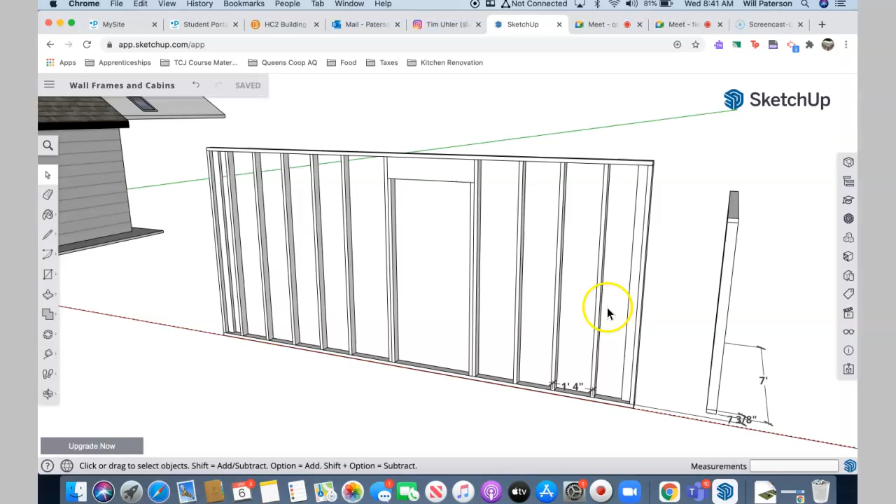Okay, so here's where we're at. So yesterday, what I did is I made this very attractive, particularly the colors, model of mine, which is the Centurion Palace of Solitude, and right next to my other creation. Remember this little guy? There it is, the Cubby triplets. Okay, I'm putting them all together. So that's what I did. That's what I did yesterday.

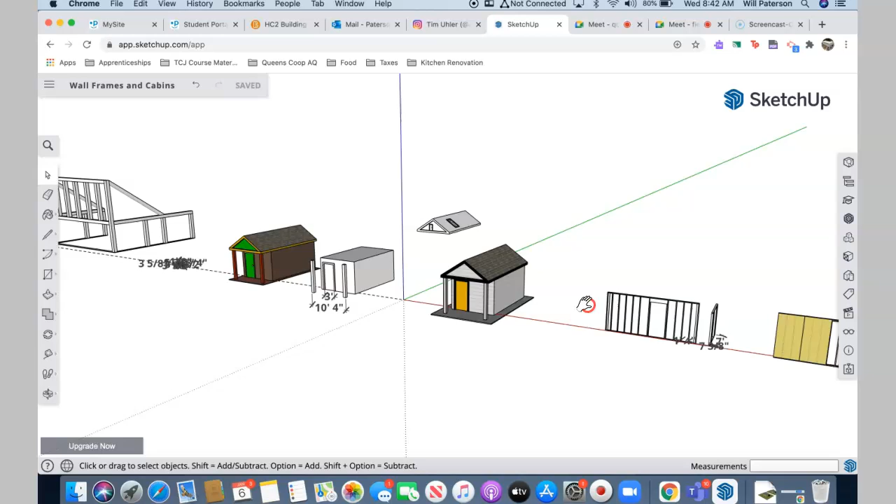And then the trick now is to get from that, which is the concept sketch. Okay, and here's the same thing, by the way. I just happened to redraw it. That's the same thing. Colors are a little bit nicer here. So to get from here over to here, which is where you're actually framing the thing. So in order to get from A to B, in order to get from the concept sketch to the frame model, you need to understand exactly how to draw just a regular wall. Okay, just a regular wall.

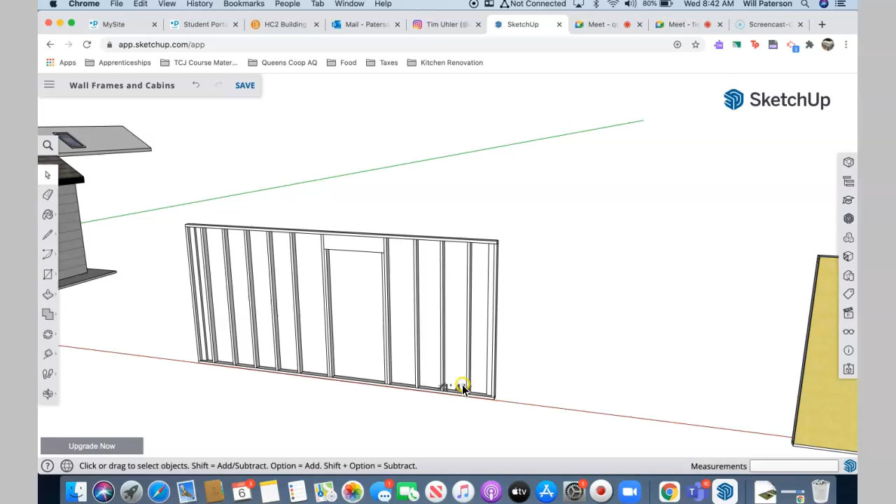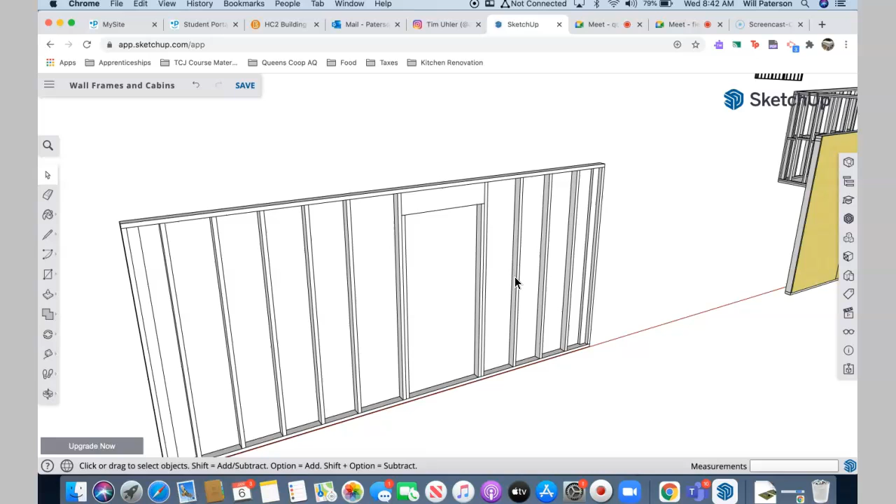So I'm going to get rid of a couple things here, and there we go. So this is just a regular wall. Now, Mr. Figuera, he kind of went through before Christmas and looked at a little bit of the anatomy of a wall, looked at a little bit about the spacing and that kind of thing, and so this will serve as a bit of a refresher, but then also to jump ahead and understand exactly how to build it. So I want you to understand a couple of things here before I start drawing.

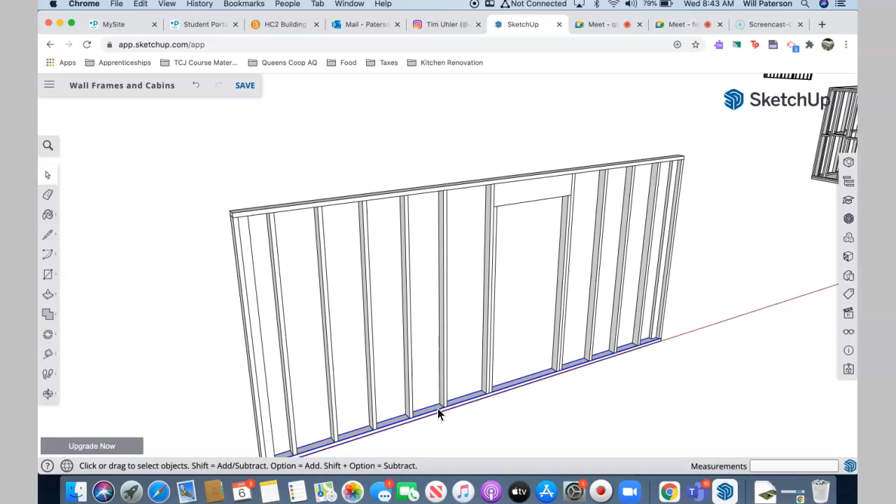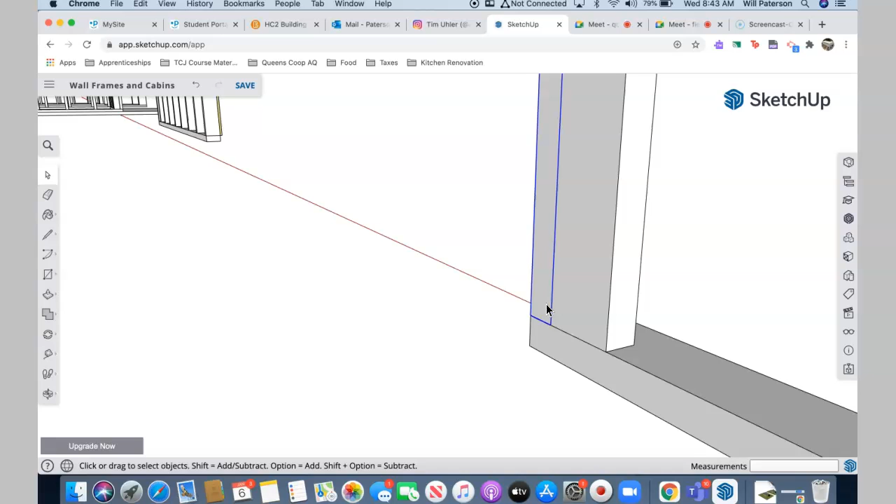The first is just some of the names here. So the pieces, the regular pieces here, these are called wall studs. Okay, wall studs, and bottom plate down there, top plate up here. Okay, bottom plate, top plate, and then down at the ends here. I'm just going to jump inside. There we go. Okay, down at the ends here, you see how this looks kind of interesting. You've got that piece in the end. You've got the end stud there, so the stud on the end. Then you got this other piece here that's spun 90 degrees.

So that is called an inside corner. Okay, just remember that it beefs up the corner. It allows you to nail or screw the drywall on that wall when there's another wall that comes in. This is called an inside corner. You will understand more about it when time comes and when we start putting the walls together.

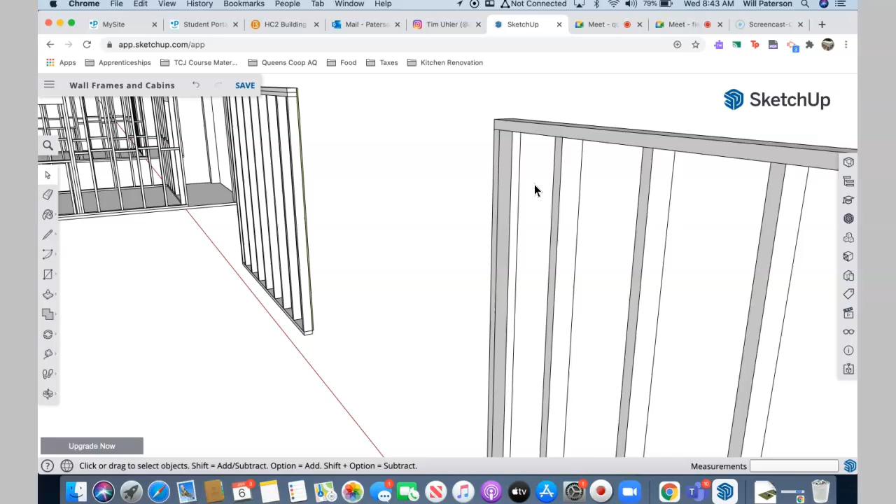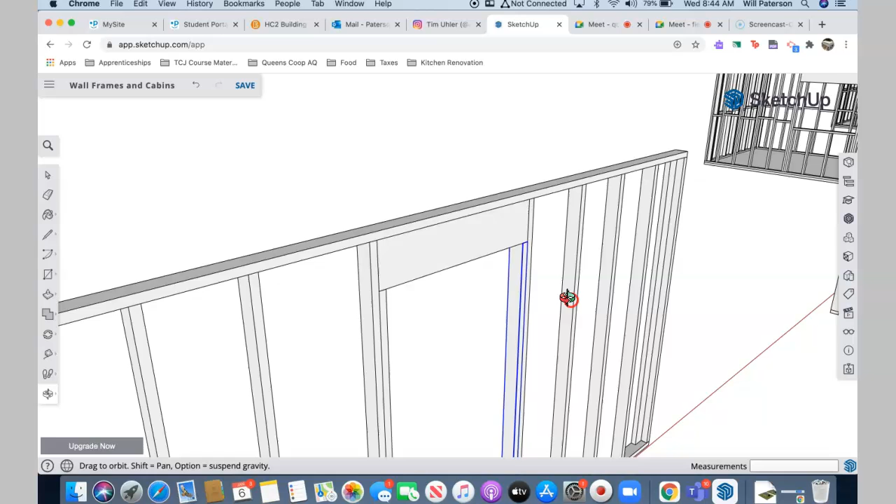Okay, and then for the openings, so for window and door openings, let me back out here. For window and door openings, you've got the piece across the top, which is called a header. Okay, that's a header, and then you've got this piece here that holds up the header, and that's called a trimmer. There we go. So that's called a trimmer. It holds up the header, and then you've got the king stud beside it. So that piece that goes all the way up is called a king stud. That's a trimmer. That's a header.

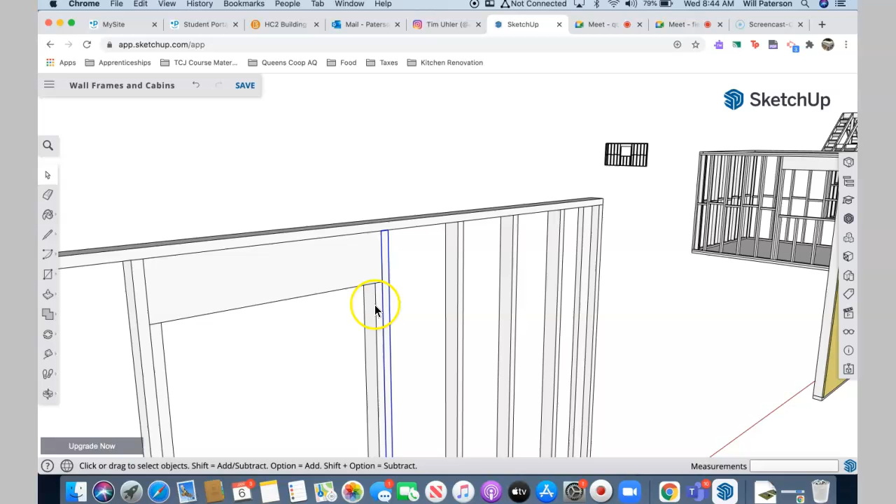Okay, and so now what I'm going to do is I'm going to start drawing a wall. I don't know if you notice this in SketchUp. It's a little bit wonky the further you get from that center point there. Where the blue line, the green line, and the red line intersect, the further you get away from that, then it's a little bit more difficult to navigate. So I'm gonna move things around so I can draw close to there.

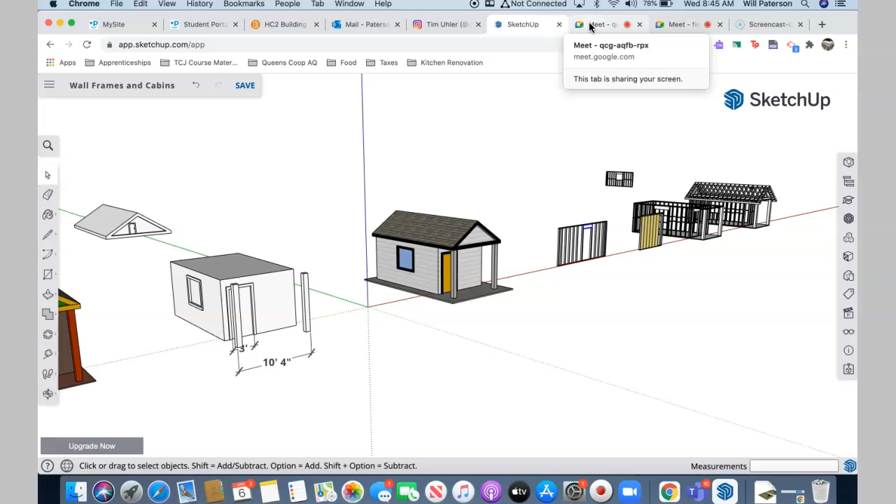Okay, did I hear something come through in the chat here? Oh, hi. Yeah, so Malcolm, just hang tight. Have a look at what we're doing because you're going to be doing some of the SketchUp stuff too. Okay, and I am presenting.

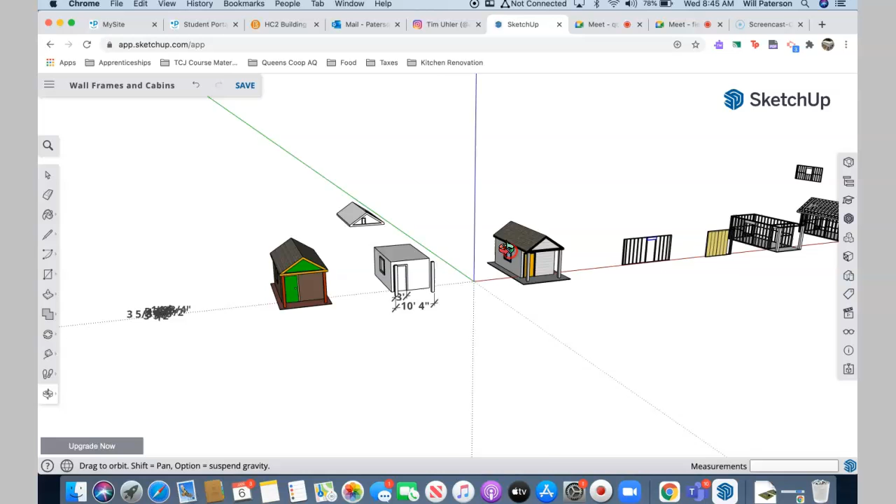All right, so I'm just going to shuffle things around here so that I can do some drawing closer to the intersection of the axes. Okay, so I'm going to take this and I'll move it.

I'm going to move it over here. Notice whenever I move things, I always stay true to the axis. So I make sure that it's a green line. That way it stays on the axes.

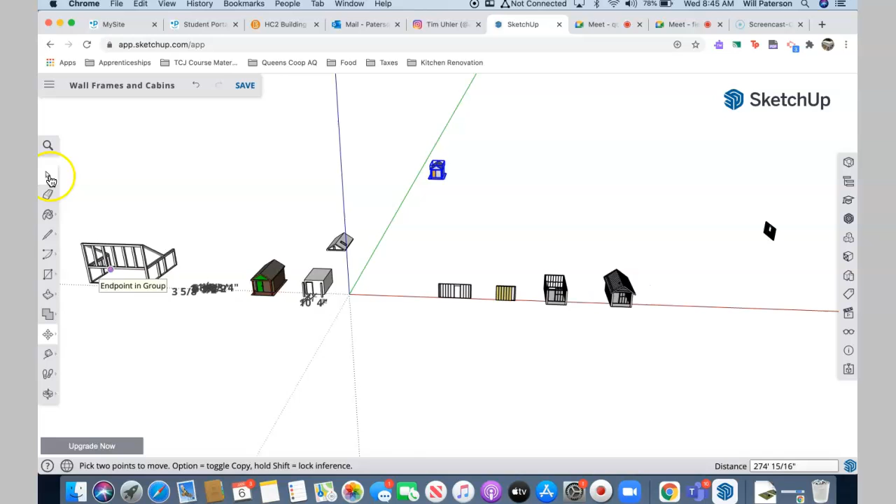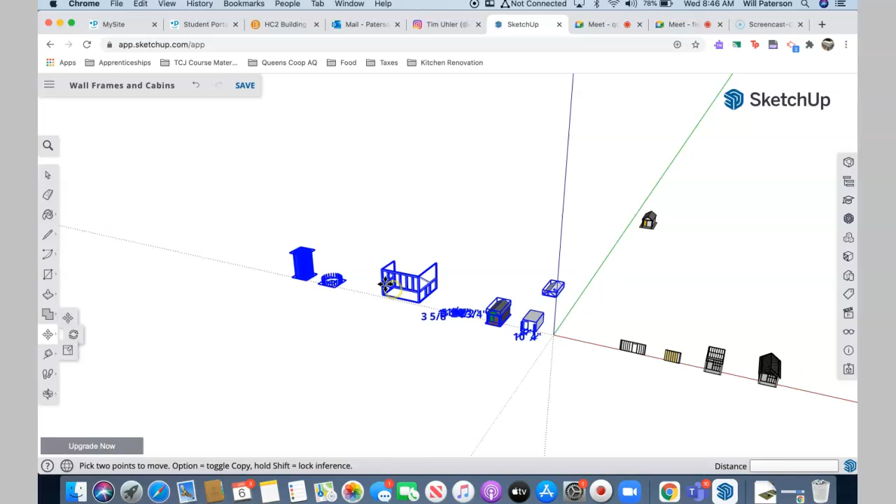Okay, these things over here. Look at that. This is from a person who wanted to do radiused walls. She wanted to do a turret. A turret is like those old castles that have the round walls and sort of the conical roof. That's called a turret. So she wanted to incorporate that kind of thing. See how I moved all these things all at the same time.

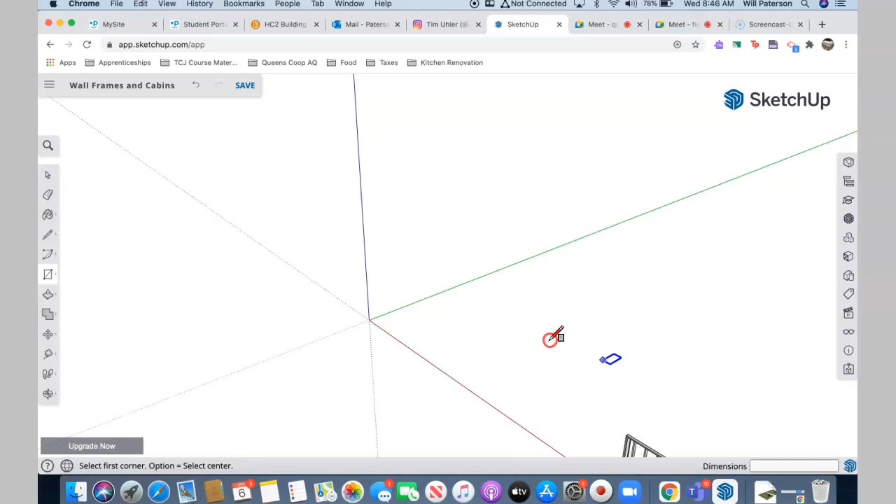Okay, and now what I'll do is I'll come in here and I'm going to draw. So whatever I do here, this is what I want you doing, just to practice getting the hang of building a wall. So I'm going to start to draw a rectangle. I'm going to draw the bottom plate of my wall, and let's make it 101 inches, just for argument's sake.

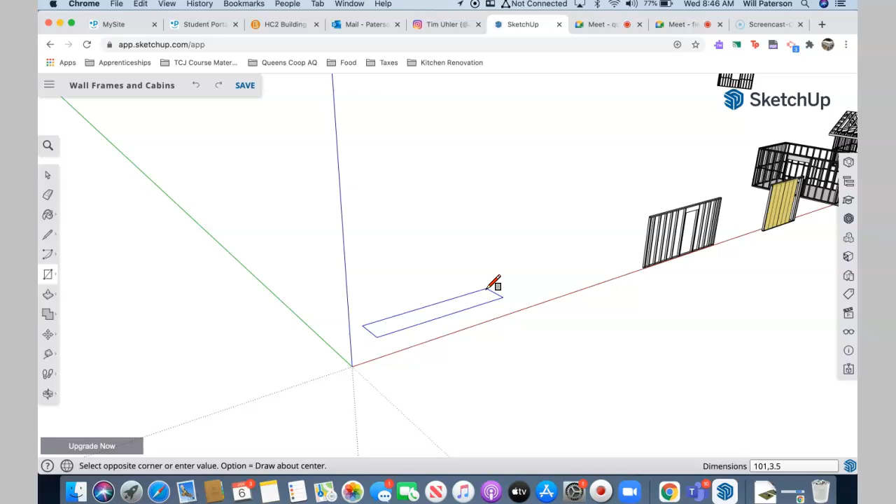So I'm going to type 101, comma, 3.5, okay? 101 and 3.5. Now, why 3.5? The reason is because what we're drawing here is a 2x4. A 2x4 is 3.5 inches wide, and it's 1.5 in thickness. So that's what I just drew.

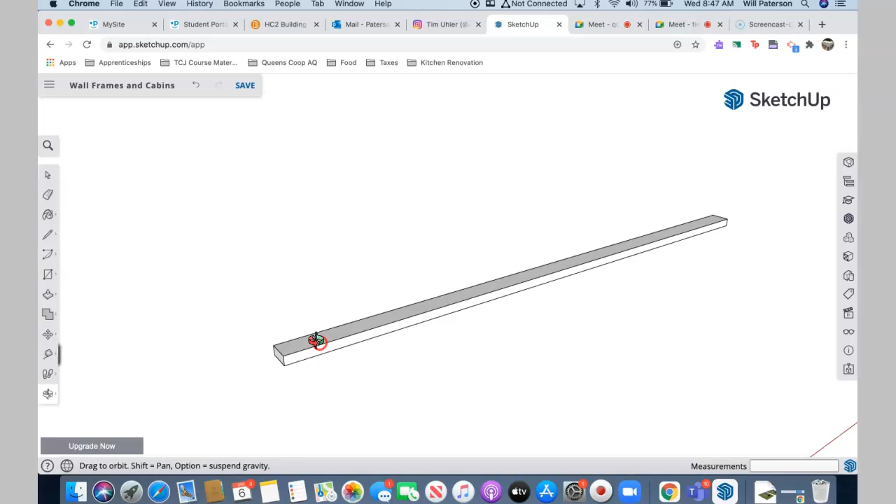If I took my tape measure here and look at the end, this is a 2x4. This is 3.5 inches wide. It is 1.5 inches high. And then the length is whatever it is. Now there's nothing that has to happen to this 2x4. This is the bottom plate of the wall, so it's basically done. I'm not gonna cut a curve in it or drill holes or anything.

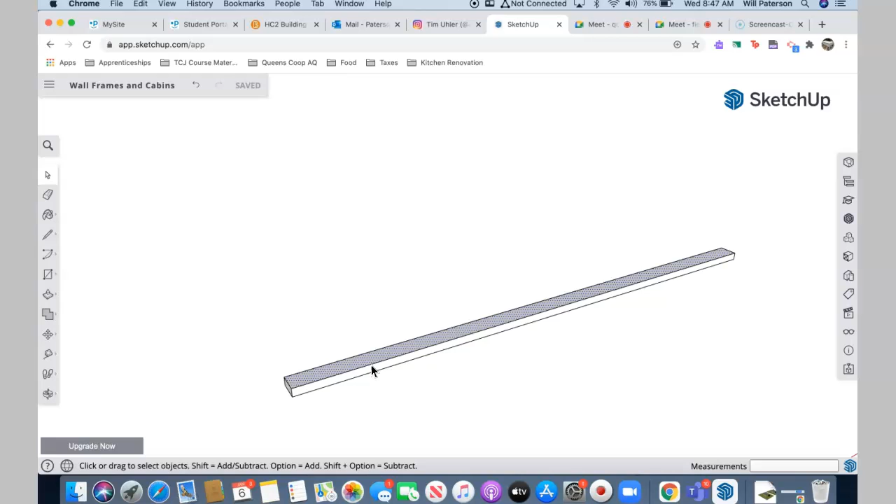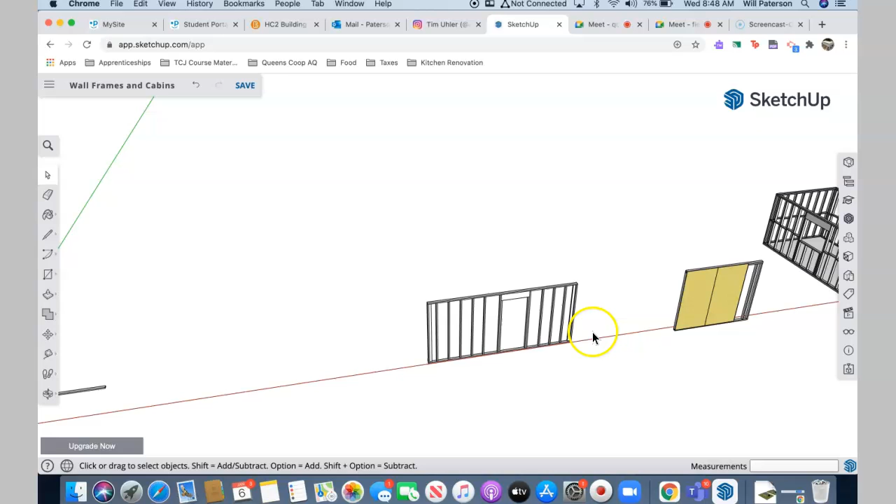So I'm gonna triple click, 1, 2, 3, make it a group, and then the next thing I'm going to do is start laying out the wall. Now, I mentioned this yesterday, and we've talked about this before. Mr. Figuera talked a little bit about it as well. We talked about 16-inch centers, the spacing between the studs.

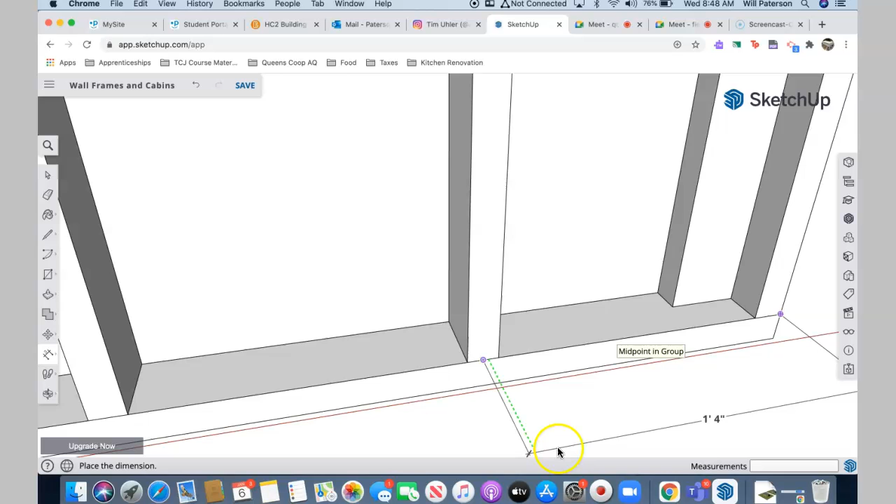So I'm going to take my dimension tool here and start measuring. From the end of the wall to the center of the first stud is 1'4". You see that? And from the center of that stud to the center of this stud is also, let me just see if I can move that, there we go, 1'4".

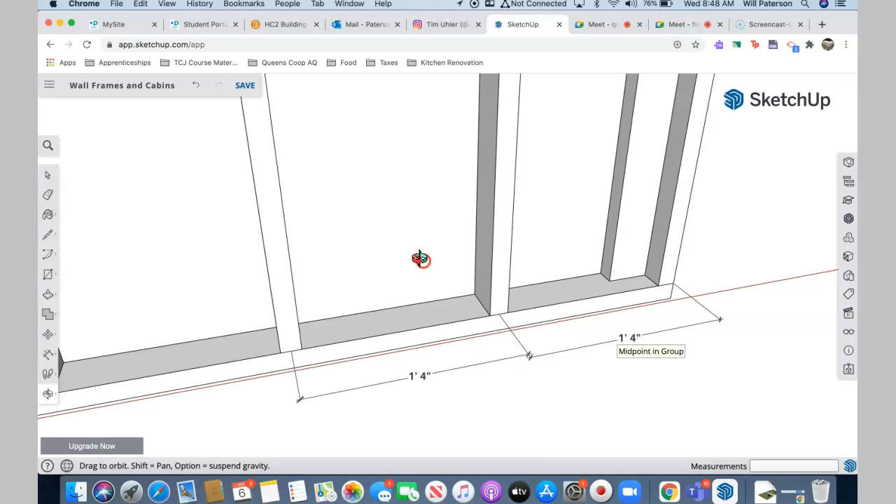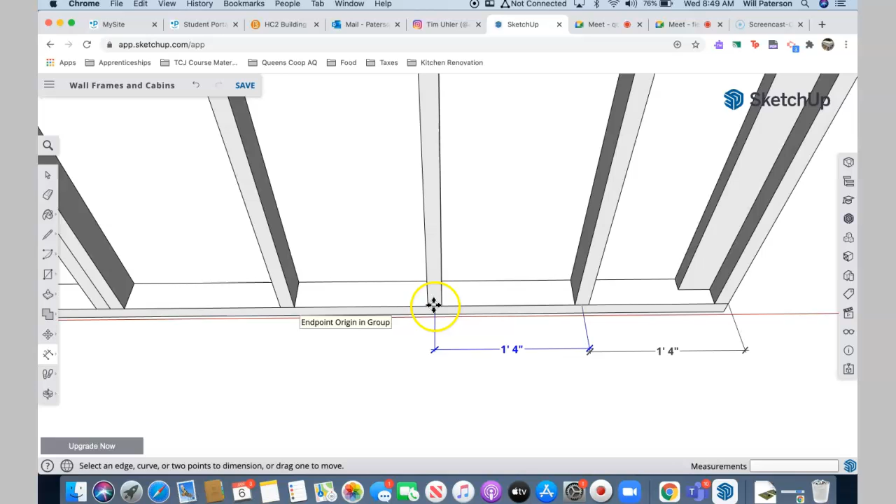And this is really, really important to know, because this will mean that your plywood and drywall and insulation will all fit. So from the end of the wall to the center of the first is 1'4", and then center to center of each one after that is similarly 1'4". I'll do one more here. From here to the center of this one is also 1'4".

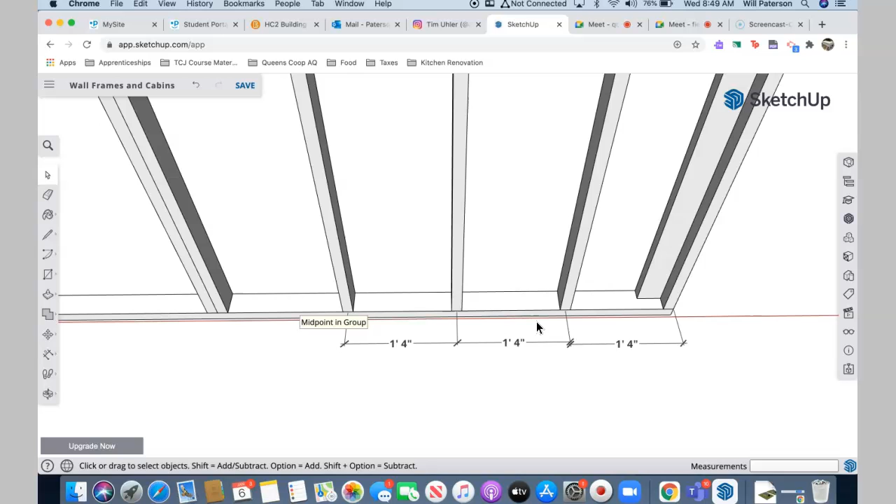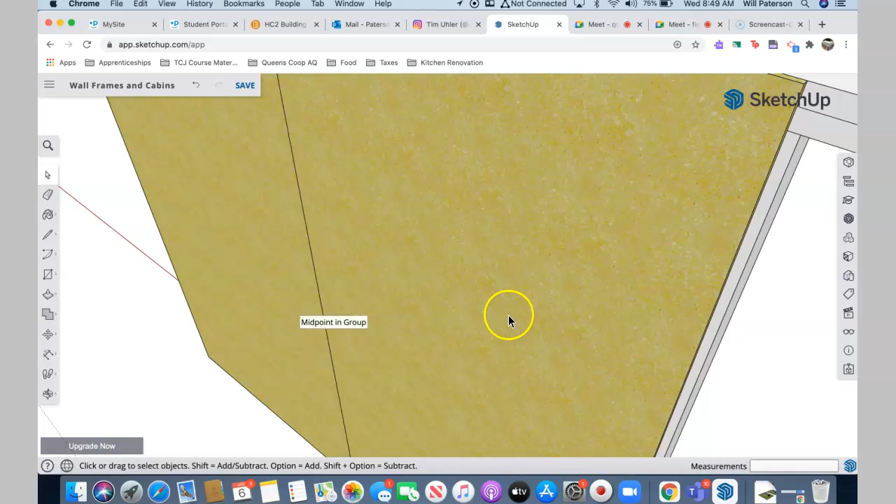Now, I am measuring to the centers, not the edges, just to make you understand that when the material goes on, like this plywood here, it ends up being in the center of a stud. See that? The plywood or the drywall ends up in the center of the stud. That's why we call this on-center spacing, or 16 inches on-center.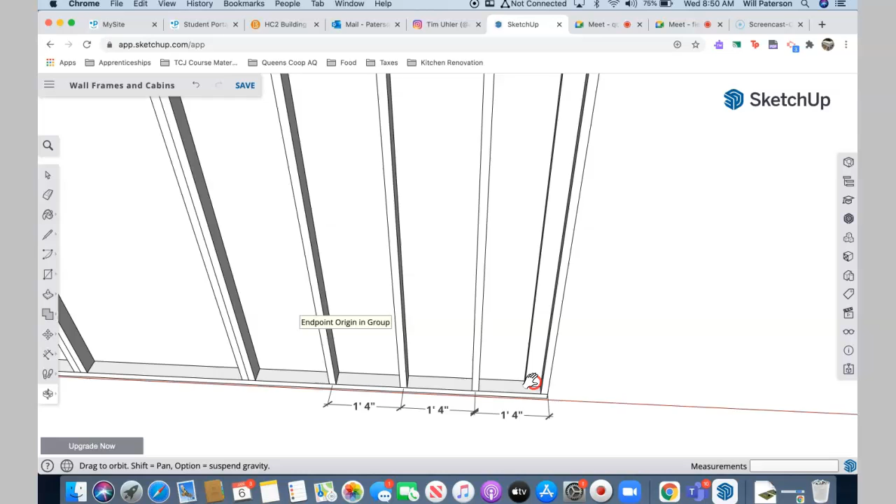But for actually building this, when you're laying it out with a pencil and a square and drawing lines on the wood, instead of marking the center, you mark the edges. To mark the edges, I'm just going to get rid of this inside corner so it doesn't confuse you, okay?

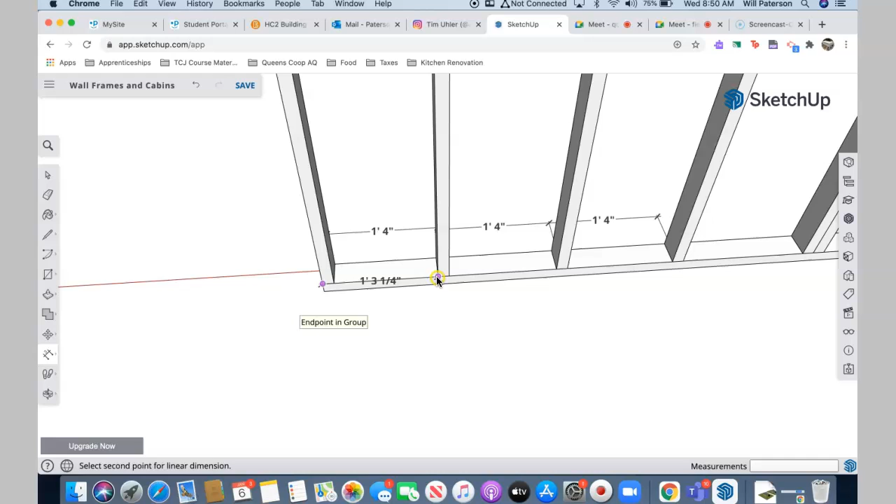So to mark the edges, I'm going to take the same dimension tool, and I'm going to go from here to this edge here, okay? And that's 1'3¼", and then from that point on, it's 1'4" edge to edge, 1'4" edge to edge, and so on. Okay, so you see that? So for laying this out, that 1'3¼" is 15¼ inches. That's from the end of the wall to the edge of the first stud.

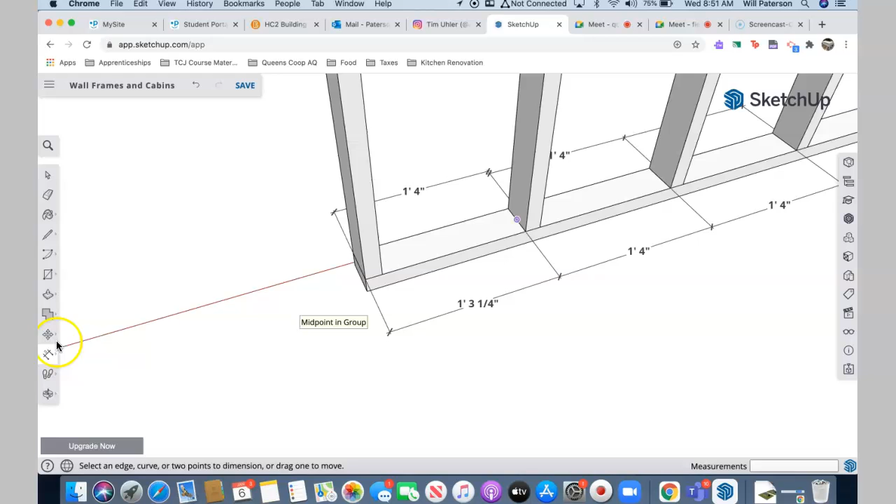And then from the edge of that one to the edge of that one is 16, which is the exact same thing as if I measured from the center to the center. It's the same dimension from the center of that one to the center of that one. 16 inches from center to center, or 16 inches from edge to edge.

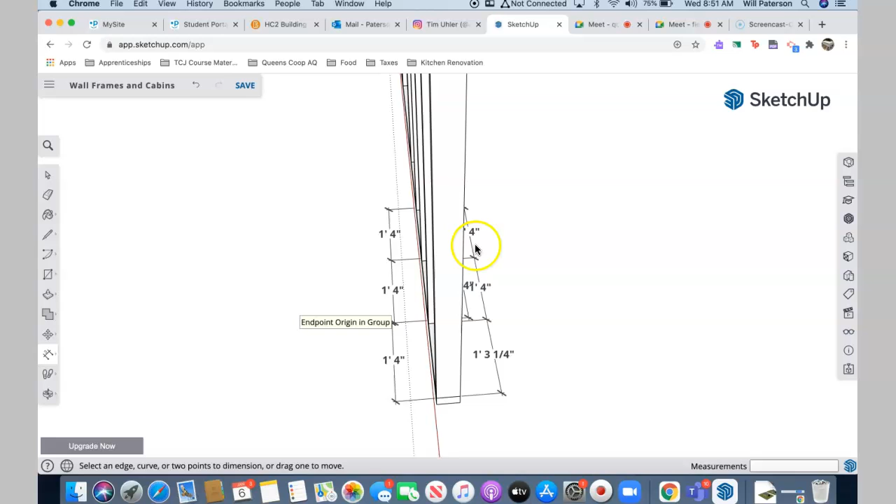Okay, so let's use that information, and we're going to go over to the wall that I'm building over here. And here's my bottom plate. And so now I'm going to take my tape measure tool, and I'm going to come down here and start laying out this plate. So from the end here, remember what I said, we're going to go to the edge. We're not going to go to the center. We're going to go to the edge, because that's how you build stuff. You line it up with the edge. You make a pencil mark that represents the edge of a piece of material.

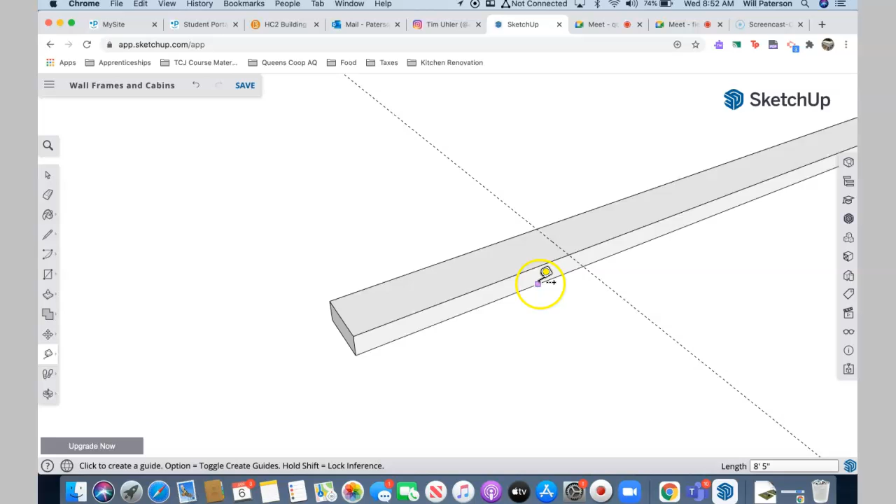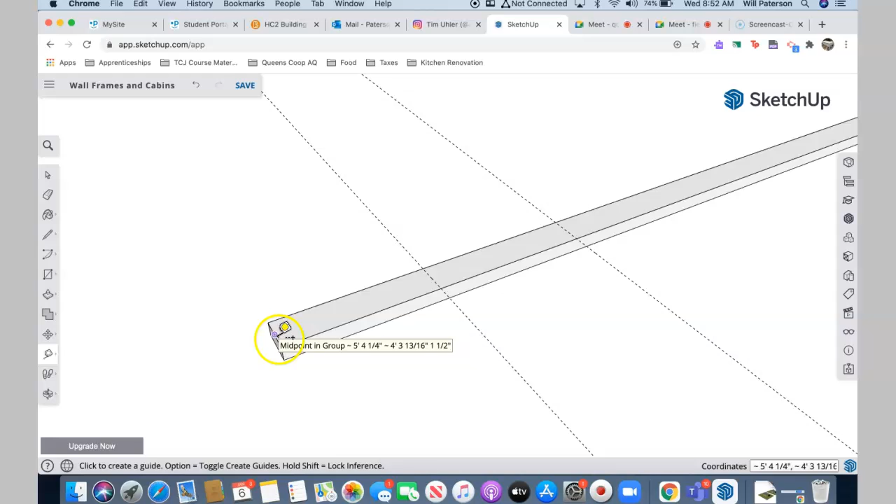Okay, so it was 1'3¼", which is 15¼, which is 15.25, and I hit enter. And so that gives me my starting point. And then after that, it was 1'4" or 16 inches from this line on. So I'm going to go 16 inches and enter like that. And so I'm going to place a stud on the right side of those lines. Now, how thick is a stud? Well, it's the same as the bottom plate. It is 1.5 inches.

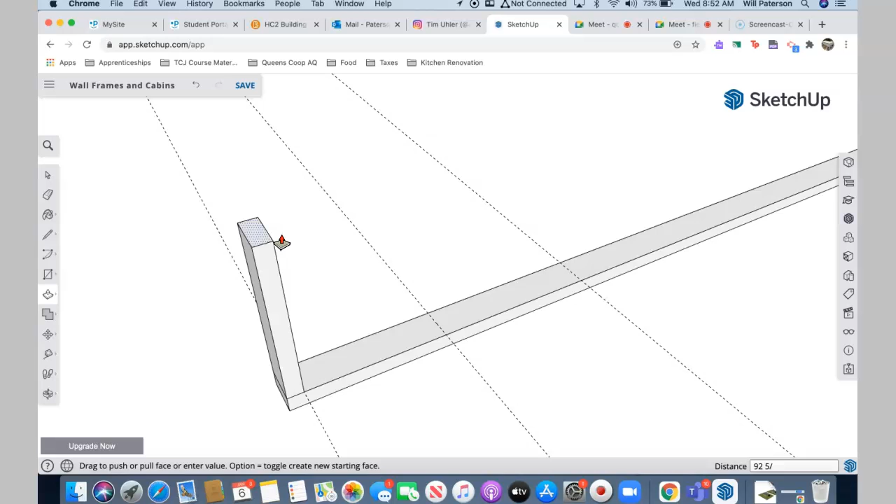And I'm going to take this rectangle tool here, and I'm going to draw a rectangle there. Now, I'm going to lift it up. Just bear with me here, this sounds strange, but watch this. And I think Mr. Figueroa might have touched on this. The height of this stud, I'm going to make it 92 5/8. Now, why am I choosing that weird number, 92 5/8 of an inch?

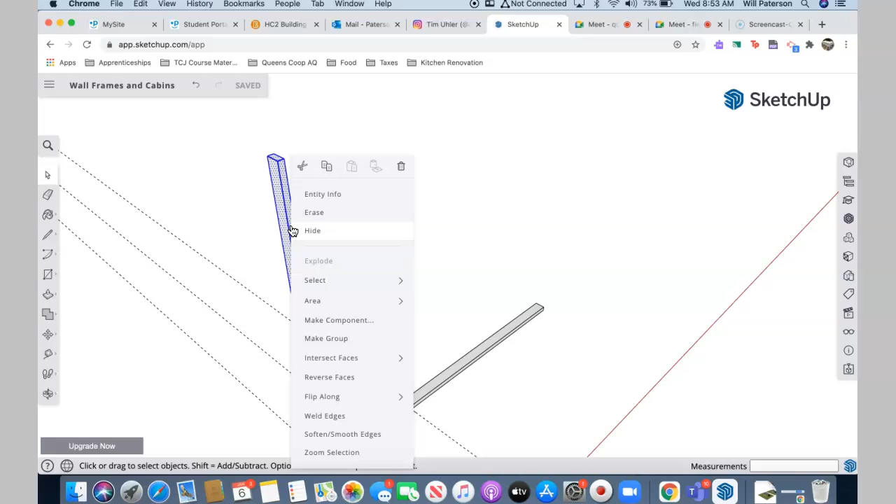The reason is because that is called a pre-cut stud. You can walk into Home Depot and buy that, and it's a little bit cheaper than a 96-inch stud, which is 8 feet. And the thing about these is they're already cut so that if you just nail a wall together, you will end up with an 8-foot wall in a house. So these are called pre-cuts, and that's what I'm going to use for mine. So I'm going to make this a group, because that's all done.

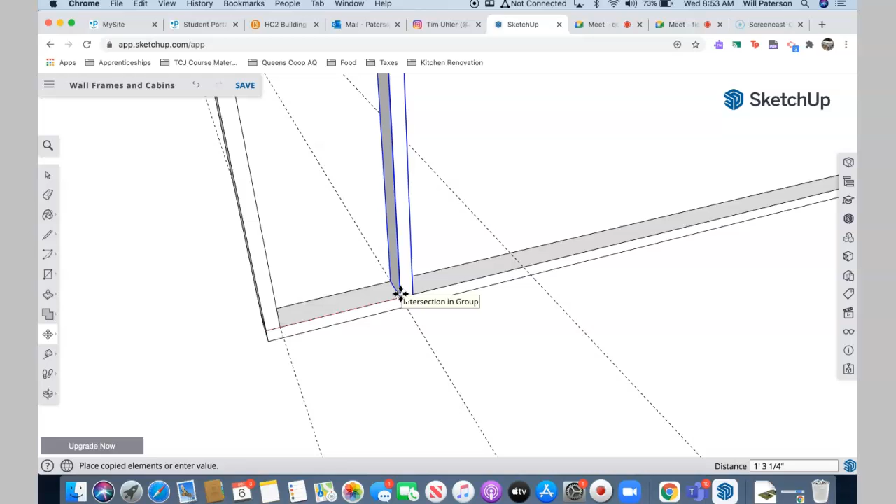And now, watch this. A little bit of magic here. What I'm going to do is take this and move and copy it. So I'm going to grab it here, move it, copy it, and place it just to the right of that line, just like that. And next I'm going to move and copy the next one. Now, this is where the magic happens. Just pay attention to this. So this is the third stud along. I'm going to place it by clicking, and then don't do anything else.

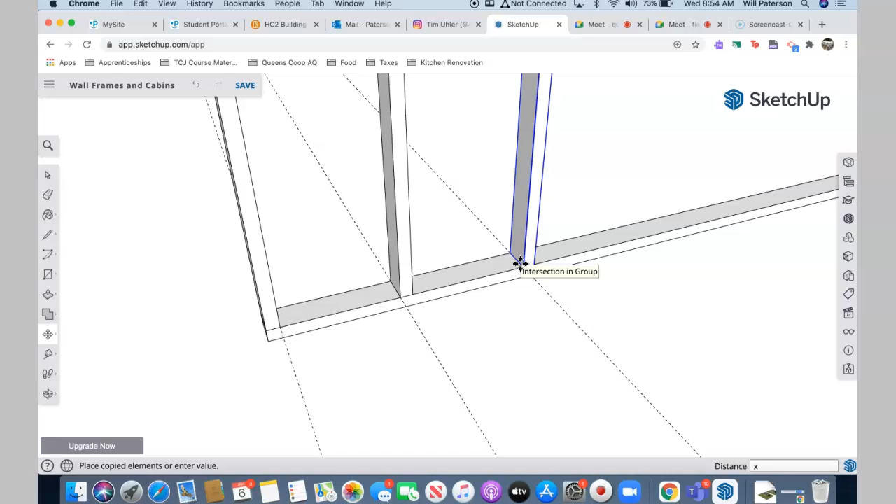On your keyboard, hit multiply. Look in the bottom corner. See the X? I just made an X. Multiply by however many studs you want. I'm not sure how many I want, so I'm going to put 8. It's probably more than enough, but I can delete it. So see that times 8? I'm going to hit times 8 and press the return key, which is the enter key. And look what happens. It gives me a ton of studs.

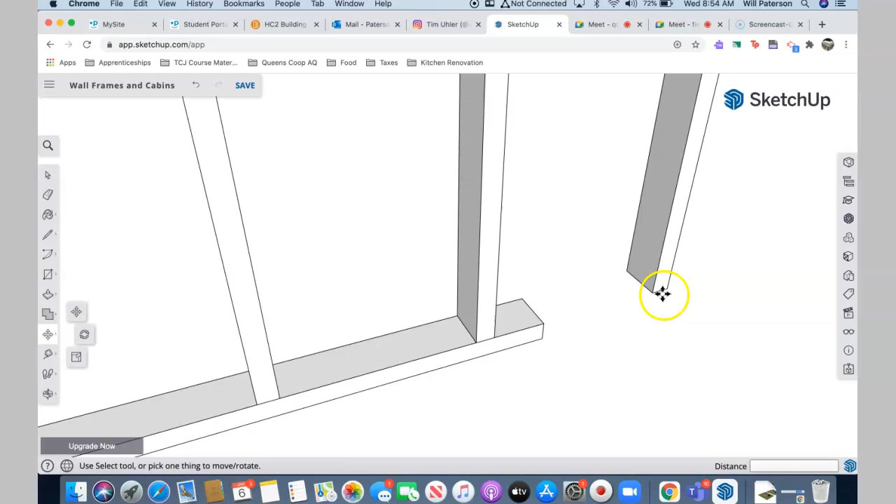And now I don't need all those studs. I'm going to keep one of them there. So I'm going to take that one that I kept, and I'm going to move it like this, right onto the end of the wall, like that. Okay, and that's almost done. So now I'm going to put a top plate on it.

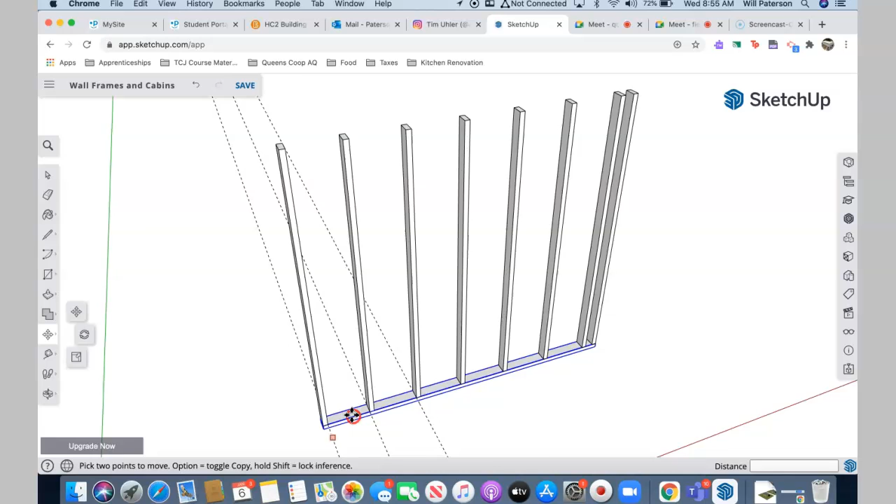So I can take this bottom plate and move it up with the move tool. I'm going to grab it here, start lifting it, hit the Option key on a Mac or Control key on a PC, and place a copy of that bottom plate at the top. Okay, let me get rid of my guidelines.

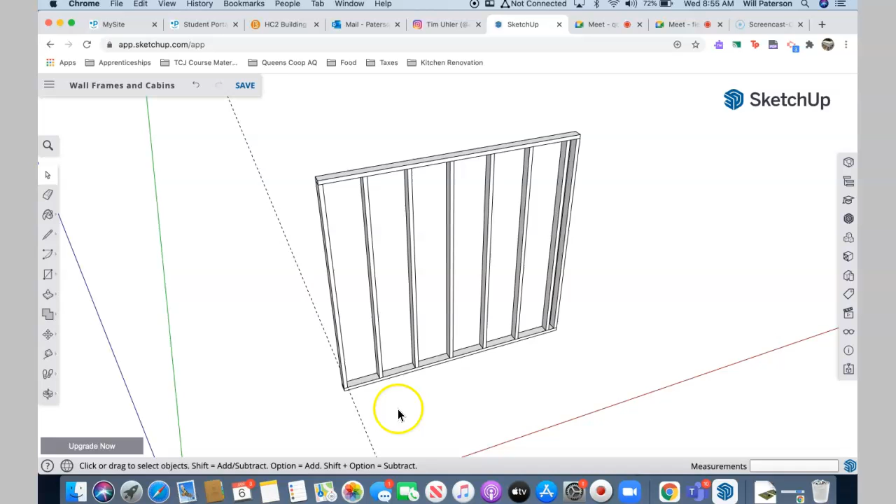Okay, that is a basic wall. There are a few more things we'll add, but basically here's what I want you to do, and here's what you're going to show me, or at least hand in.

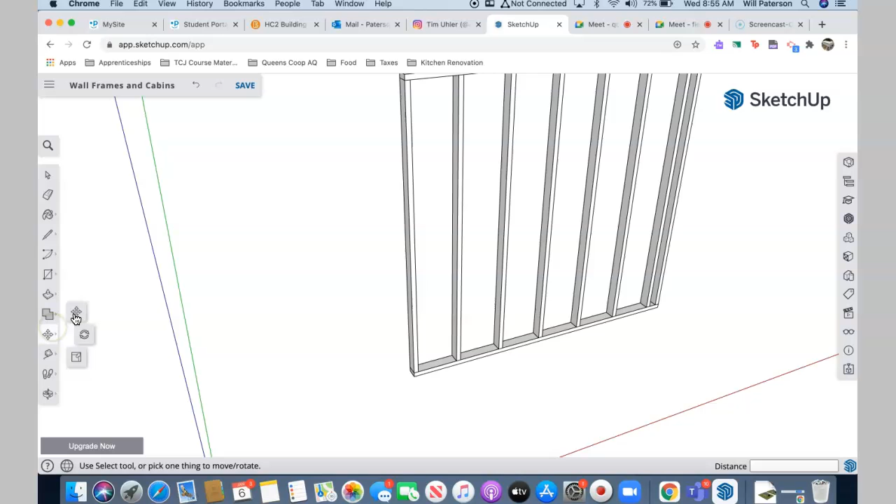Let me grab the tape measure. You're going to show me the spacing here. So 1'3 1/4" is to there, and 1'4", and so on like that.

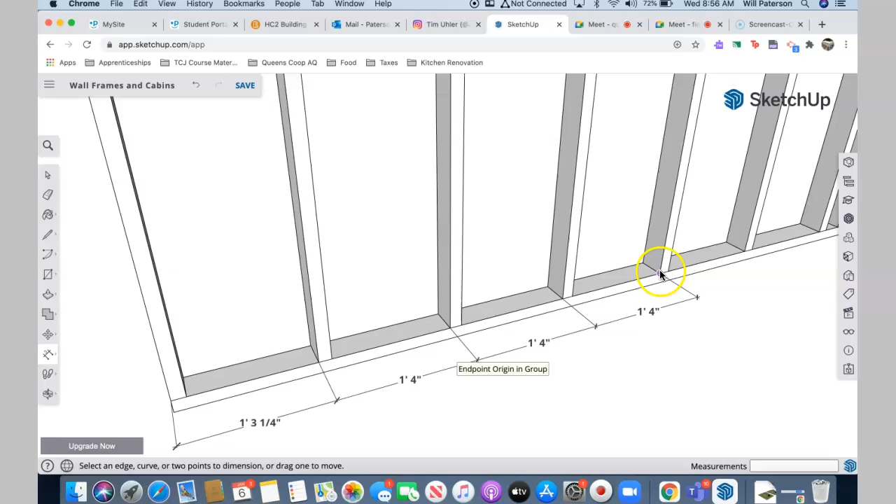There we go. And the end one—it doesn't matter about the end one. I don't really care what the distance is there, because you can make your wall whatever length you want.

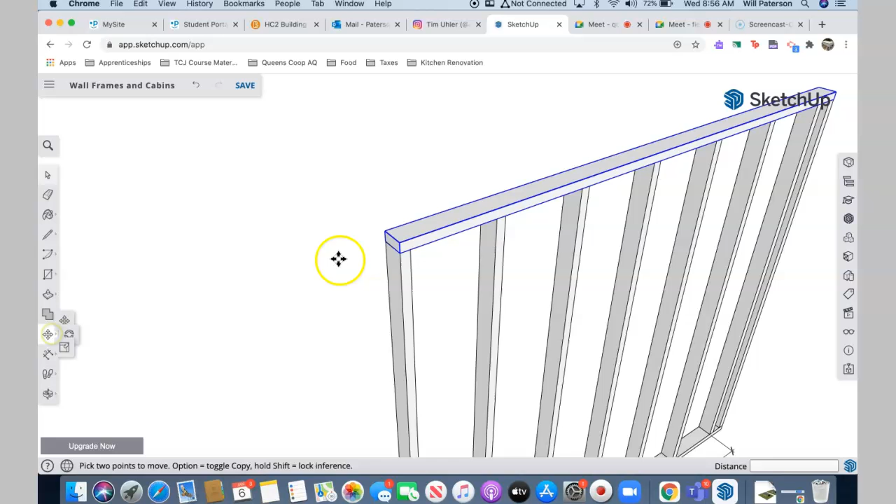So here's what I want you to do. Oh, actually, sorry, we have to add one more plate up top here—there's a double plate on the top. So I'm going to copy this one up and put it there like that.

Okay, so double plate. This is just a very basic wall. I was going to have you do something a little more complex, but we'll get there. I think I want to see that people know how to do this, and then we'll take it from there. So what you do with this is now you take a screenshot of it.

Or you go up here and export it as a PNG or whatever, and I'll give you a space in. So here we are back in here—I'm going to add something right in here, an HC2 for you to hand that in. Okay, where did SketchUp go? There we go, so I'll add a spot for you to hand it in, but that's what you're handing in.

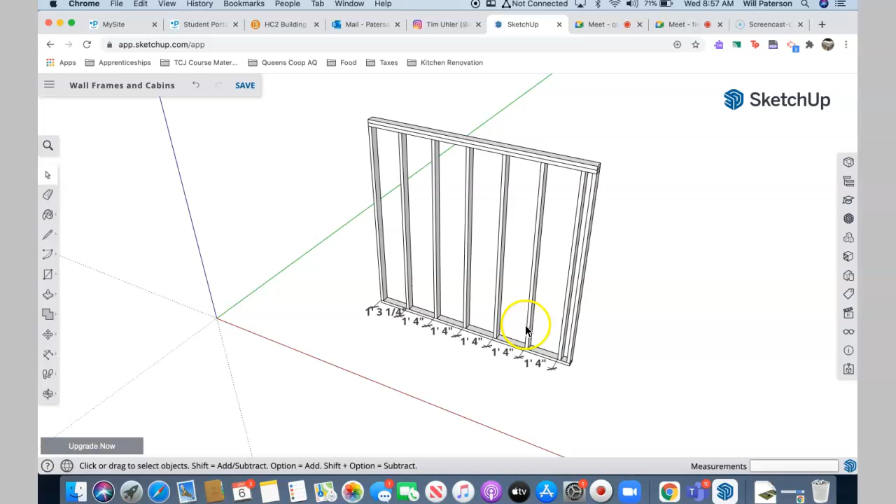So you're going to take a screenshot of that, or hand it in as a PNG or whatever it is. I want the dimensions there, and let's make the thing. Where's the tape measure here? For length.

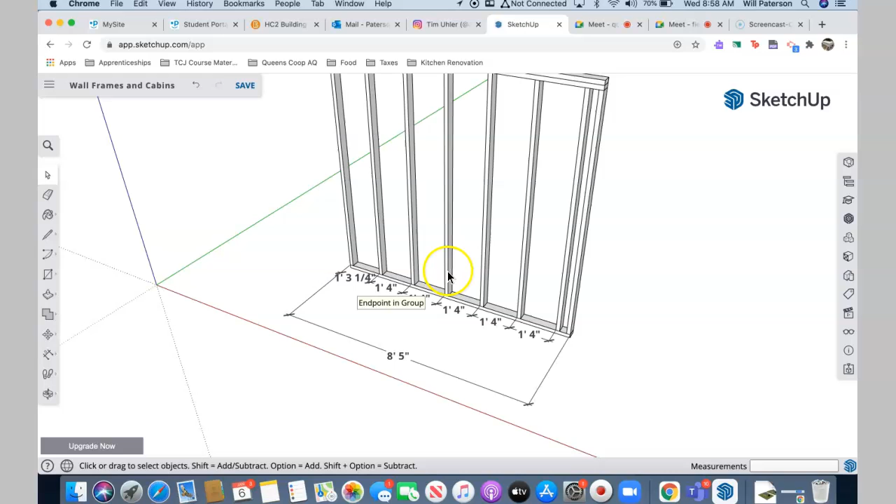Okay, so this is 8'5". I want you to make it at least 8'5" or more, your choice. But get all the studs in the right spaces—this is crucial. If you don't have the studs in the right spot, then your wall basically doesn't work in terms of putting the material together.

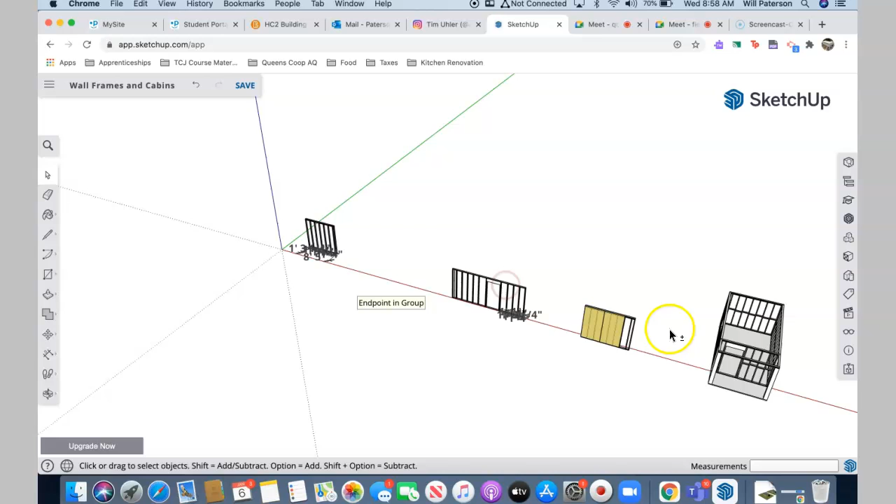So this is the building block for what comes next. And when this is done, and you show me that you can do that, then my next demonstration in drawing is—where's my building? I put my building somewhere over here, didn't I? I'm going to take my building, which is over there.

I'm going to take this building and start drawing it. So what I'm going to do is put a floor down, and take one of the walls. See this wall here, for instance? This wall here is a blank wall, and that's basically what I just drew.

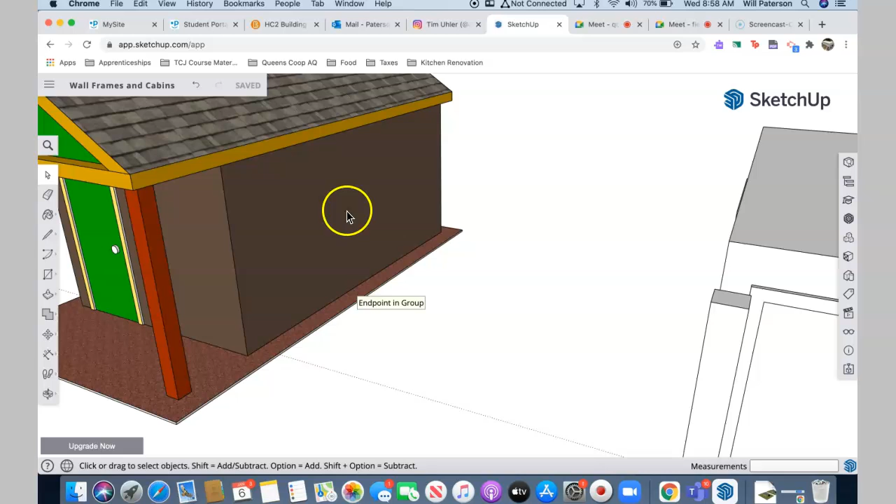And so you're going to draw—I would start with the easiest wall. So you would start with the easiest wall and then work your way around. And here's the frame, so this is what I'm going to start drawing. I'm going to start drawing this wall here. So see, this is the easy wall.

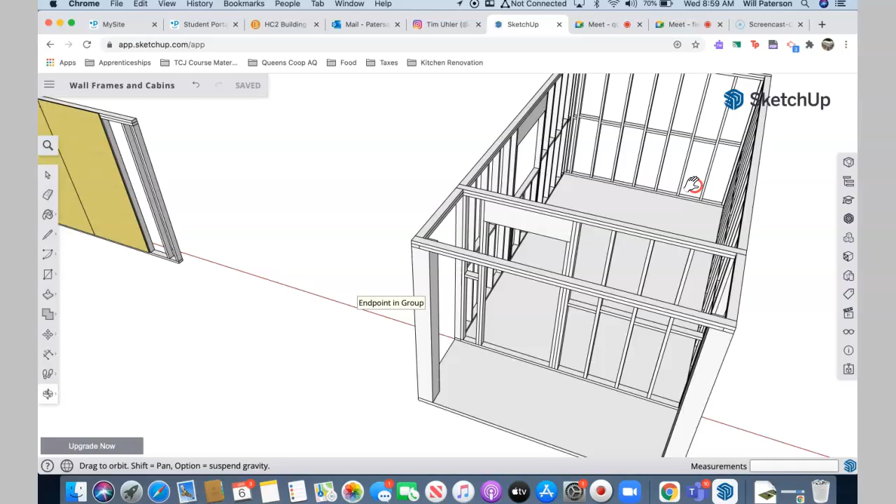That back wall is pretty easy, and once we get those done, we start moving into a wall that has a window, a wall that has a door, and then when all that's done, we start talking about the roof. So this is your mission.

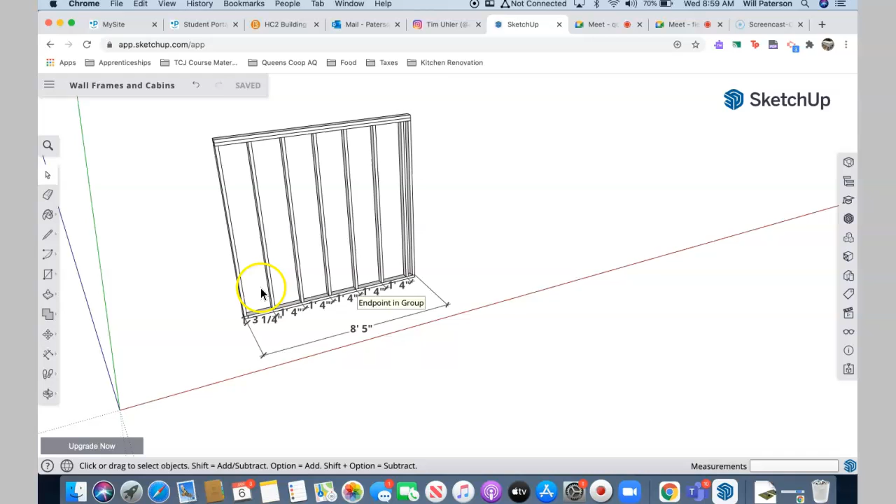If you're ready for this, you're going to copy what I just did, except you're going to pick your own length, 8'5" or longer. You're going to draw this, and I'll open up a spot for you to submit it. Okay, so that's the first of everything today.